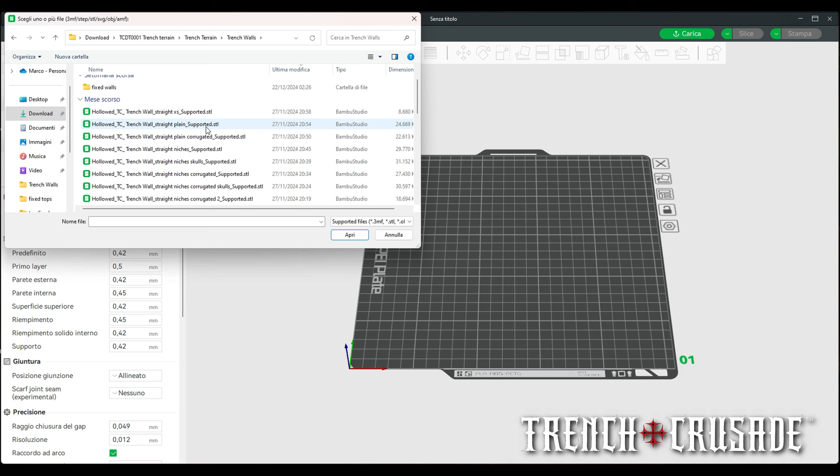In this second video, I will try to show you how I set up the tiles of the official modular trench system of Trench Crusade that I designed for printing. Let's import a straight tile for simplicity. I use the Bambu Lab slicer because it's the printer I'm using at the moment, but everything I do can also be done with any other slicer.

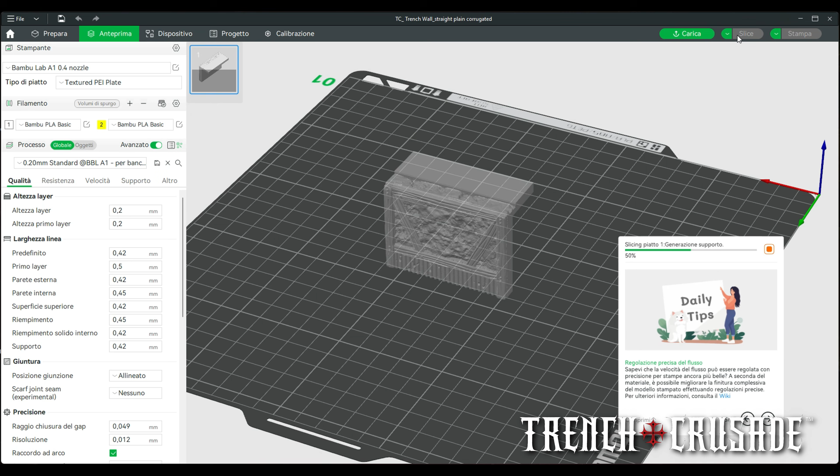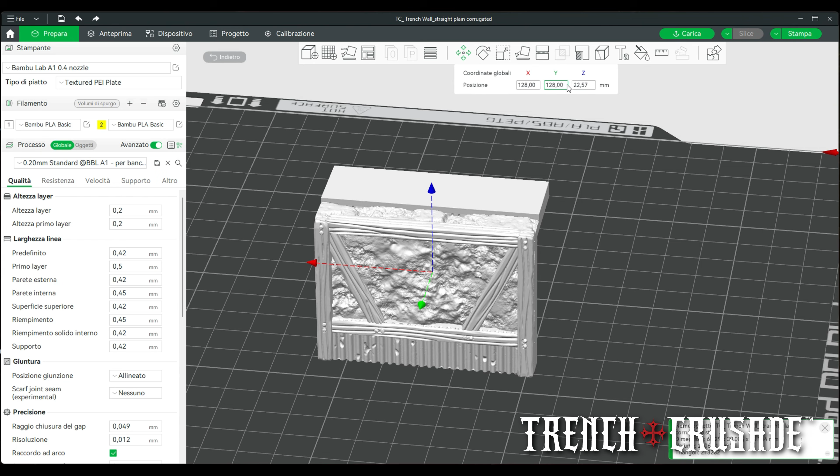As soon as I import the piece, I slice it, and immediately you see the problem that some of you have encountered. The bottom and the side faces are not completely flat. The first layer, as you can see, is not a full layer and therefore creates adhesion problems. This problem can be easily solved by lowering the piece on the plate by a few tenths of a millimeter.

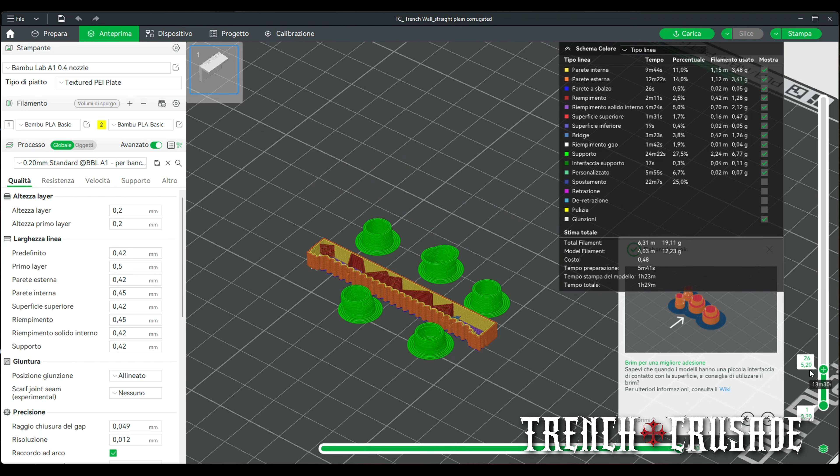I slice it again, and as you will see in a few seconds, the first layer is perfectly flat and adherent to the print bed. Problem solved. Note that by the time you see the video, the files probably will have already been modified and imperfections resolved. So no worries.

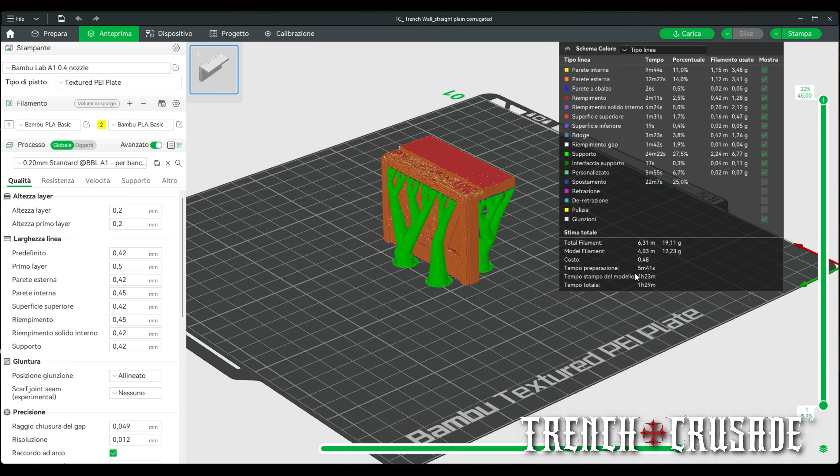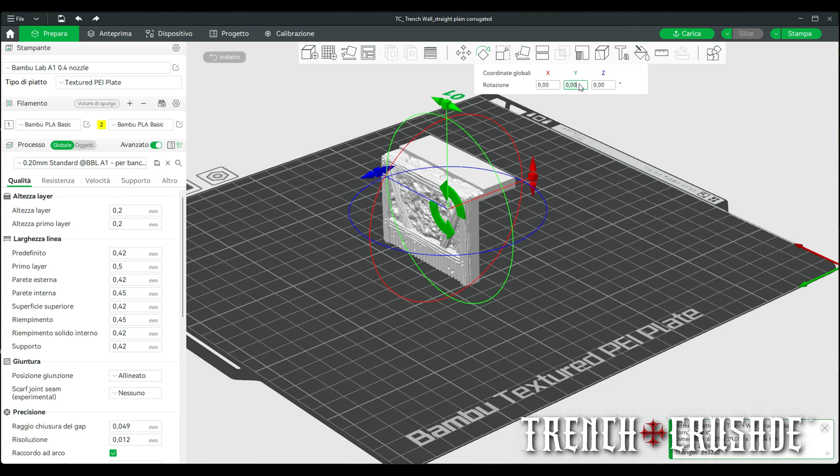Now let's look at the print time. It is 1 hour and 23 minutes, with 12 grams for the piece and 20 grams of filament in total, so with a consumption of 27% of supports. What I recommend now, both for print quality and also to save a bit on supports, is to lay the piece on its side.

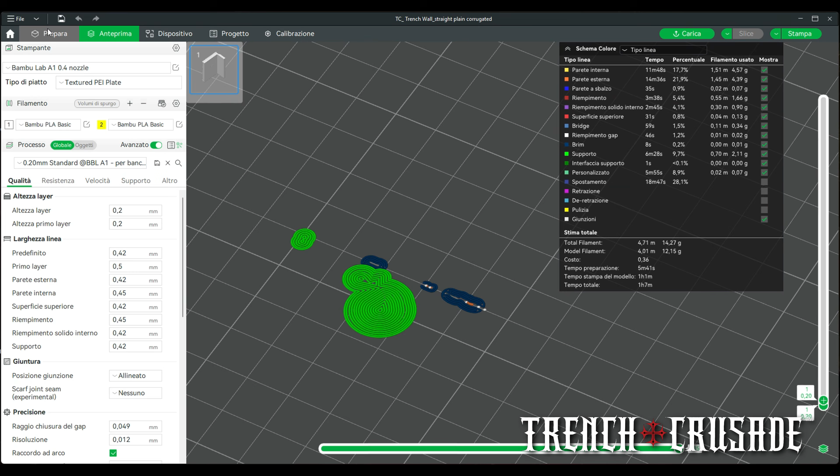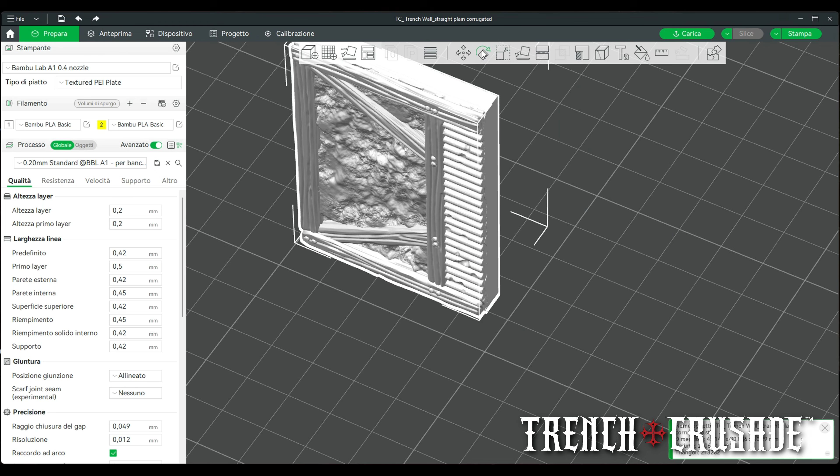Here too, the first layer does not adhere perfectly. So, again, to create a perfect adhesion and to solve the problems during printing, we lower the piece on the plate again by a few tenths of a millimeter to eliminate the first layer. Always check by slicing, and if necessary, lower it even more. Do it until you have a complete first layer.

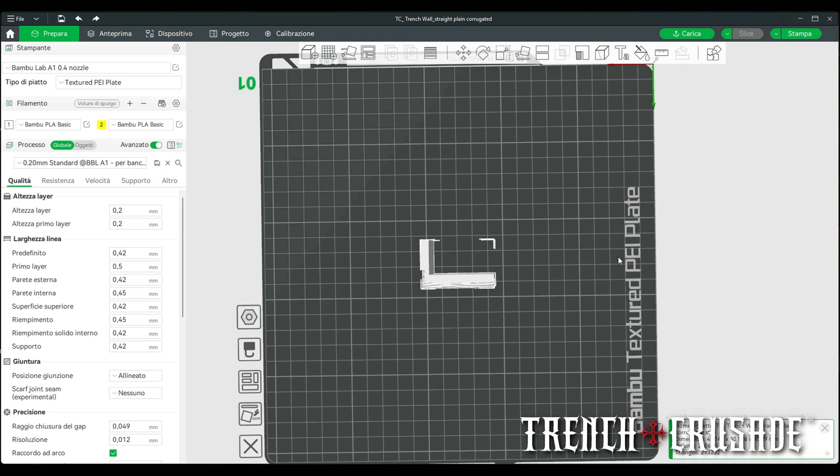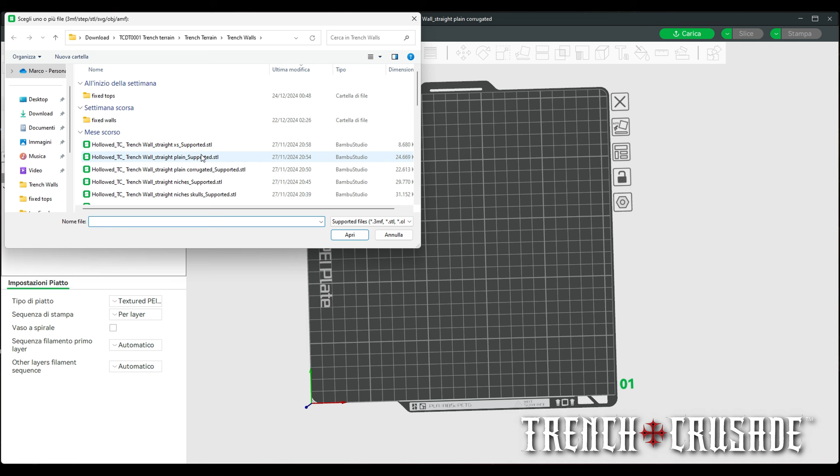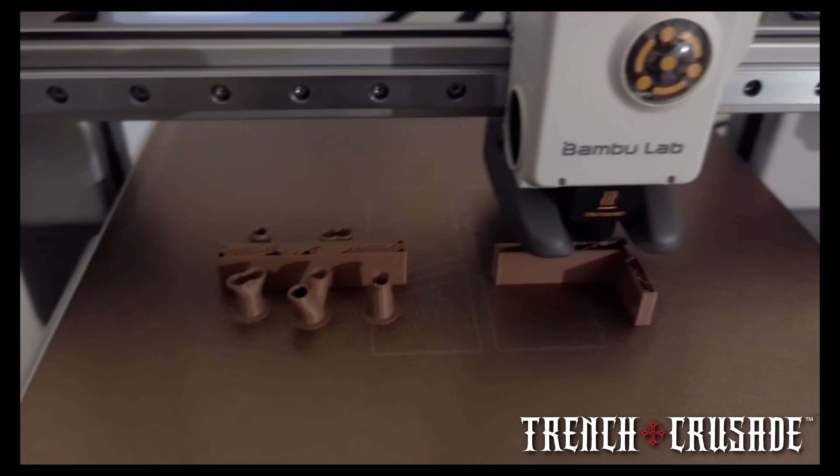Just to check, I printed the two tiles, one vertically and one laid on its side, to see if there are differences in the print. The print went very well, and the quality in the two prints is very good. In conclusion, I must say print them laid on their side. Less supports and almost equivalent printing time.

And if you have older files, lower them down to the build plate to get rid of the first problematic layer. I hope this video will help those who are finding it difficult to print my files these days, reminding everyone that the new corrected files will be uploaded shortly.